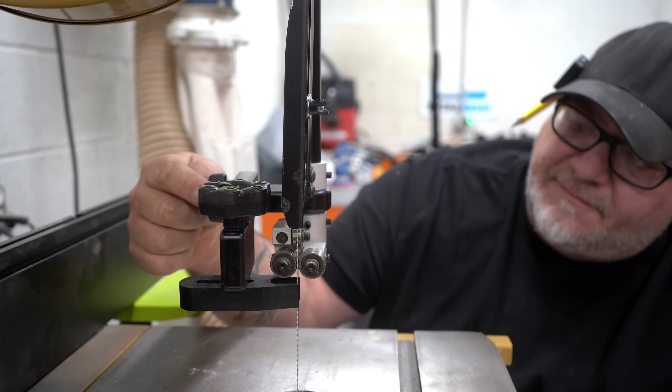Today we're looking at 1, 2, 3, 4, 5, 6 woodworking aids you can build in your shop just out of scrap wood. This one's my favorite. Ow. These 6 jigs start from really easy to build and kind of go up the hill to intermediate. So what we're going to do is start out with the easy ones.

This little thingy is really handy to have around in the shop, and I'll show you in just a second how we use it. It's just 3 pieces of plywood glued in a C-channel and a little butt stop up here on the top. Now I call this thing my thingy. What we use this thing for the most is here at the vise. If I want to position a piece of material really accurately in my vise, I put it right up there, make sure it's nice and tight up against that stop, and then tighten the vise down. Now that holds it at a very nice level, very accurate and parallel to my work surface.

So if I'm working on drawers, I can just flip the thingy around, lay my drawer box top on top of that, or drawer side on that. And if I'm doing dovetails, I can mark my layout, or if I'm doing some other kind of joinery, I can do all my layout right here with it perfectly level with this. Now, that's not the only thing we use it for. The thingy has other uses as well.

Something else I use this for all the time is cutting small pieces. Like if I have to cut dowel, I can put this stop right up against my bench and then just use a handsaw, and the side of that gives me a nice guide to get a pretty square cut. That's not something I'd want to try and cut on a chop box. I also use it for small pieces like this as well. It's easy just to hold it in, gives you a nice secure hold without a lot of effort. And then again, you have those sides here that are not perfect square, but pretty dang close to square.

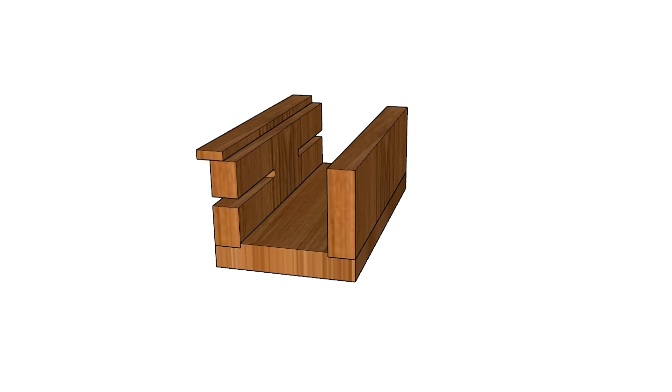Not too shabby. I found one that's 4 inches by 8 inches with 3-inch sides. Really works well for an all-around size. Then I just add a little piece of material as a stop, and that's just a 3/4 inch wide strip. And I usually offset it a little bit in case I want to set something on that lip. It's a really, really simple build. Now, you don't have to build your thingy this small if you want a bigger thingy. You just use a little bit more scrap material. And really the only reason I called it a thingy is so when I lose it, I can ask Maggie where my thingy is.

Now, like I mentioned before, I sometimes use it to hold vertical material, but I have one that's a lot more stable, and I use this probably more often for holding material vertically. So I use this to hold a panel up like that, and then I can just use one of my clamps to clamp it to it, and that holds it there, kind of giving me a third hand. What's also really nice about this with that bigger base is if I want to put stock in vertically, we're going to pretend like this is the leg of a piece of furniture. It can hold material vertically that's quite tall and be very stable. And the higher I get, the more apt I am to go to a big speed clamp or something that's got some pressure to hold it on there.

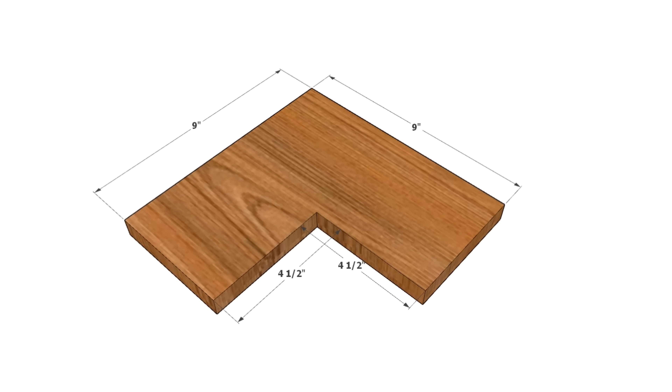To build this jig, I start with a 9-inch by 9-inch piece of scrap plywood and cut a 4.5 by 4.5 cutout from the center of it. Then I add a piece of material that's 3.5 inches tall, 4.5 inches deep, and glue and screw it because I want a little extra security. I don't really worry too much about building supports on it. Just like that seems to be plenty strong for holding plywood or legs or the kind of things that we do here in the shop. This is one of those projects, again, crazy simple to build, very useful to have around the shop, and that's kind of the focus of today's video. They're not all super simple, but all of them are really handy aids, because each one of them has their place. Now, let's move on to the next one.

This is another material holding device, and it's a little bit strange looking, but if I loosen up my knobs here and I lift straight up, I can raise the height of this from 3 inches up to about 9.5 inches, and I can lock it down in any one of those positions. Now, this isn't my idea. This came from another source, and I'll share that with you in a minute. But I did add my own touches to it. This part on the top right here has a little belly in it.

So if I'm holding round material, especially a long piece over at the drill press, I can put this on my bench, raise it up to the height I need. It'll cradle that round material. And I don't always have round material. So on the other side, it's flat. So I can also hold flat material as well.

It's probably not one of those things that I would have thought of on my own. I'd have kept just stacking blocks of wood or one of those things. But when I saw this years ago in a magazine article, I knew I was going to build it and add my own little features to it.

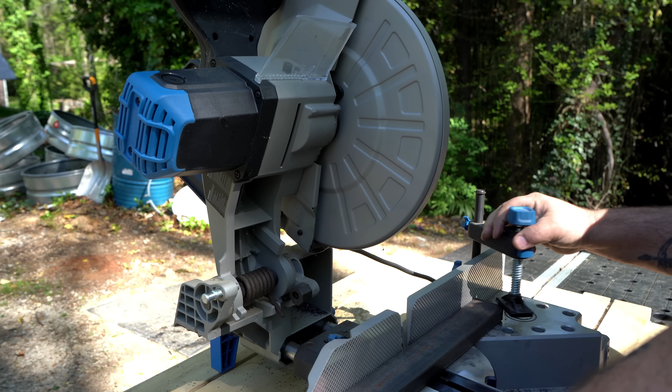Now, I first saw this jig in Shop Notes magazine. And in my opinion, Shop Notes was the best woodworking magazine of all time. They came out in 1992. They published 6 issues a year until 2014, when they unfortunately kind of closed the publication. Not sure why. But to this day, it is still my favorite woodworking magazine. And fortunately, they're still available online.

So I spent the $80 to get access to all 66 issues and thousands of pages of their great woodworking jigs and plans. It's been a very valuable source for inspiration and ideas over the years. 3 of the jigs that I'm sharing with you today were inspired by articles I found in the pages of this amazing resource.

Now, I've seen some bad actors take projects from Shop Notes and call them their own and make videos about them and maybe even sell plan sets. Now, I don't really think that's cool, but that's my opinion, and opinions vary. But I do firmly stand in the camp of give credit where credit is due. So while I'm showing you these 3 jigs today that the ideas were at least inspired by Shop Notes, I'm going to share that with you. And these were the first of the 3 that I'll show you.

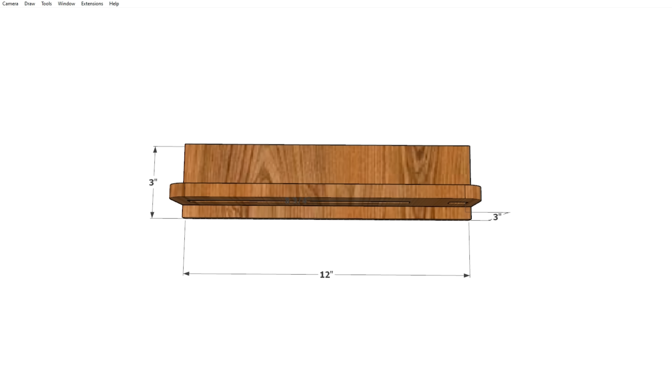To build this jig, I start with a piece that's 1/2 inches thick, 12 inches long, and 3 inches wide. And then I add another section set in a 1/2 inch back. That piece is 3 inches tall total from the base. And then I want to put an 8 3/4 inch long stepped groove in there for the sliding action.

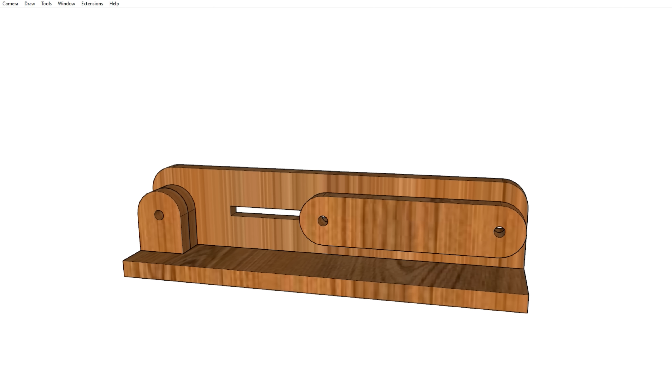Now on the back, I'm going to add 2 spacers that are 1/2 inch wide, and then my first articulating arm, 1/2 inch wide, and half the distance between the fixed hole and the end of the stepped groove. And then I cut my other 2 pieces and put on my hardware.

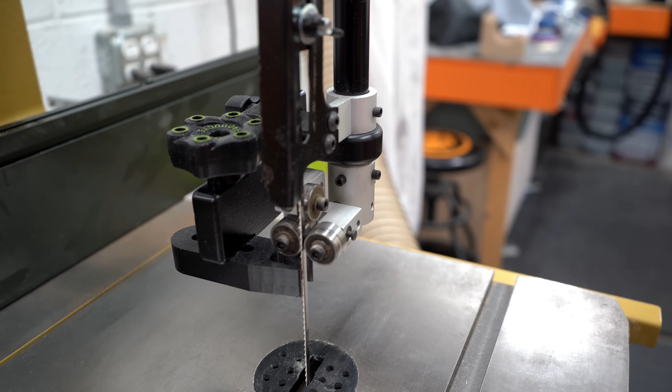This one was inspired by, I think, a 2008 article in Shop Notes magazine for a bandsaw pattern following jig or fixture. The one they had mounted on the bandsaw table. And while it was a really cool idea, I wanted something that was a little bit more practical and had more application. So I thought I'd mount it to the riser on the bandsaw, so when I adjust that up and down, I can get really thick cuts and it's still really stable.

This section right here is adjustable. I use a Bow knob and then I can loosen and tighten that up so I can get different depths, however tight I want to get to the pattern, or if I want a real big offset, that controls the offset from the pattern, and then I can tighten it down. I've also made different tips for different following needs. Now in this case, I'm using the medium one.

Now this system is not great for tight turns. It works really good for slow sloping turns. So think the side of furniture or chair backs or something along that. It works really, really well for that. I've also made it adjustable front to back. Now you can adjust the height somewhat here up and down the bar, but I have another version I'm working on that'll make it adjustable in the body of the jig itself.

Now, I'm not going to go too deep into this system right here. There's a few things that I want to change about it, and I may do a full YouTube video on it coming up in the future sometime. But so far, it's proving to be a really handy woodworking aid for template following on the bandsaw.

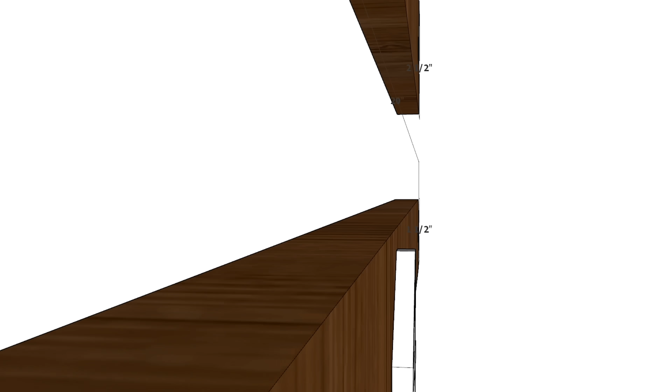Building the spacer is pretty straightforward. I start with a 1/2 piece of plywood, cut it down to 20 inches long, 2½ inches wide, and I put a 5½ stepped groove in one end in the center of the piece, like 3/4 inch from the end, and on the other end I drill a 5/16 hole. And I'm going to need 3 of those, and I'm going to need 4 of the articulating arms, which are 20 inches long, 1½ inches wide, and there's 2 5/16 holes 3/4 inches from the end. I will need 2 spacers. They're just 1½ inches in diameter, again, with a 5/16 hole drilled in the center.

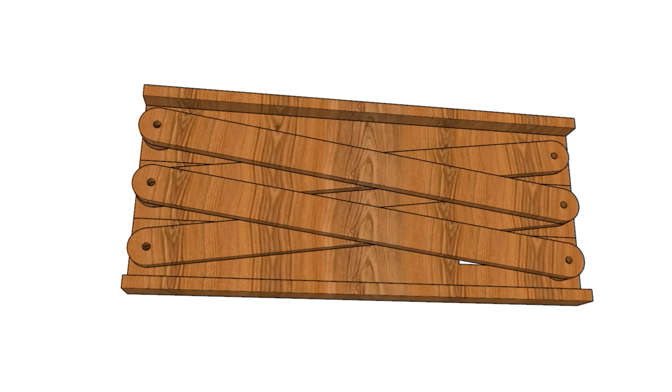Now this is all 1/2 inch material. And for the top and bottom, to give me a little more stability, I just cut a piece of plywood that's 20 inches by 1.5 inches, and those get installed on the top and bottom of the spacer. The 2 little spacers I was talking about go right here and right here. Again, I'm using the bow knobs, and I'm using their flat T-track hardware on the back. That makes it really easy to do those recessed grooves. So the spacers come in handy a lot around the shop, and we're always finding uses for it, and it's a fun project, especially for some scrap wood.